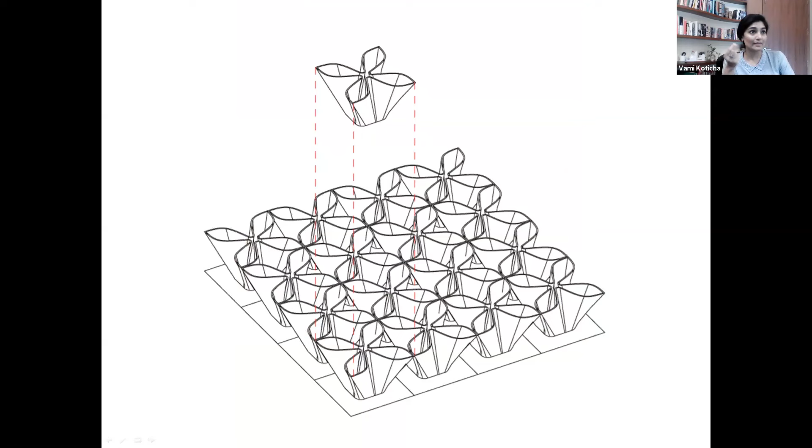Again, a very temporal space. In this picture, the red carpet that you see at the bottom is actually what we used the following year. What we did is we came up with a small module using that same red carpet and worked with these wall-to-wall carpeting guys. We asked them to come up with this module, and then all these modules stitched together, just pinned at the four edges, form a beautiful catenary arch surface.

What we've done over here is taken that latent resource and pushed it using technology to give us something that would not have been possible without pushing that kind of boundary. What it's also done is delayed the waste cycle of this raw material, and those are some images of that carpet pavilion.

The next one I want to talk about is this project, and I'll just talk about these specific items or facets of the project that address this technology aspect that we're talking about today, and here we're looking at material systems.

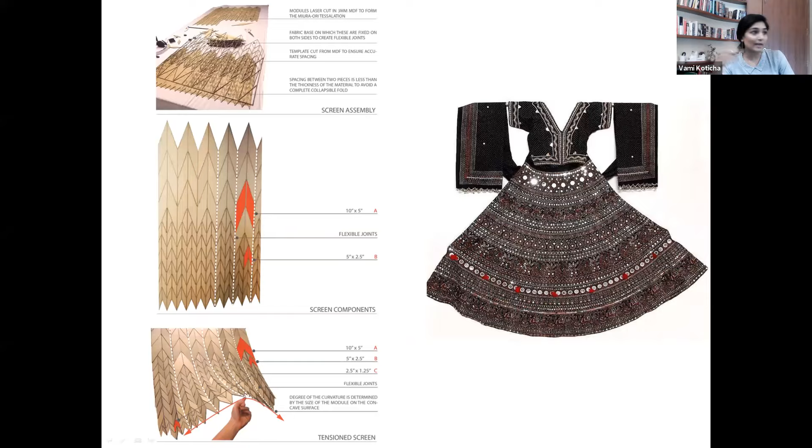So we started working with veneer and canvas, trying to see what we can do with the combination of these two materials, and started using various kinds of modules that would add structure to this fabric and body to this fabric. So the tension and the curvature in this is the new hybrid, which was a derivative of the size of the module that was being used.

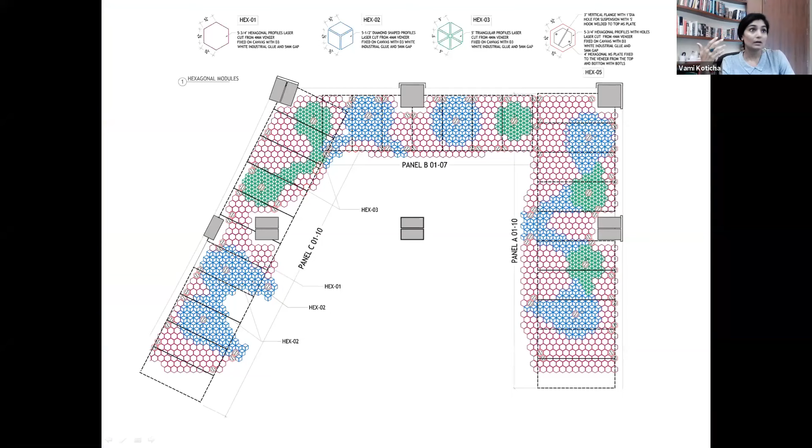Eventually, we developed 5 different modules that were proliferated all along the surface, depending on the desired result that we wanted and the kind of curvature that we wanted. It's almost like doing a curvature analysis of a 3D complex surface.

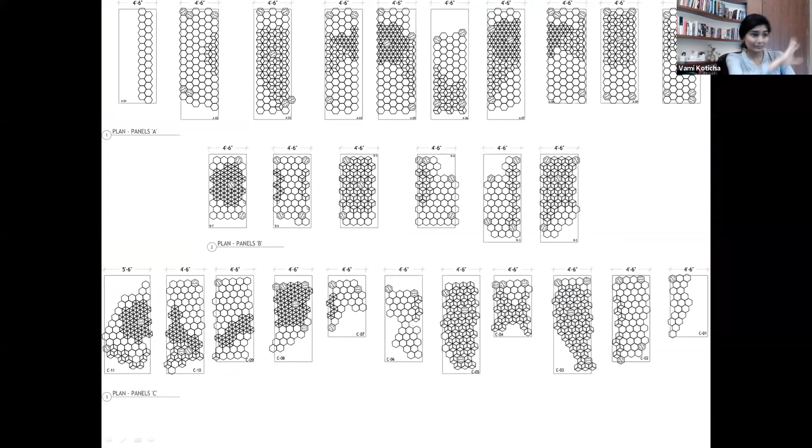These are some of the images of single pieces of canvas and how we kind of managed to lay and nest that whole thing out. And this is what the end product was - it's like a hybrid, almost like a veneer cloud floating above.

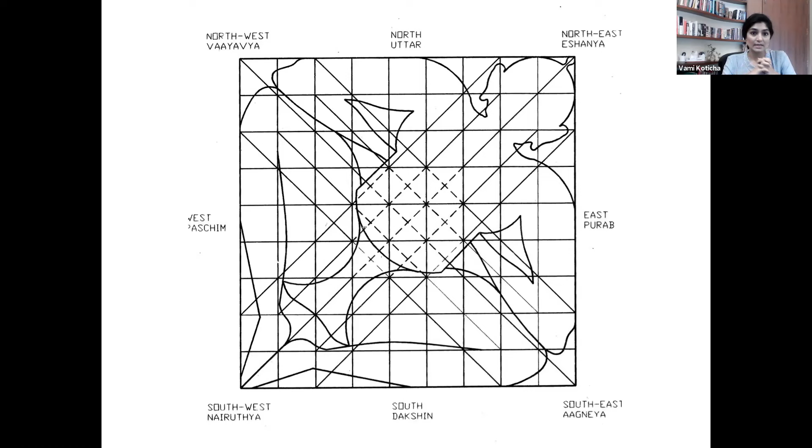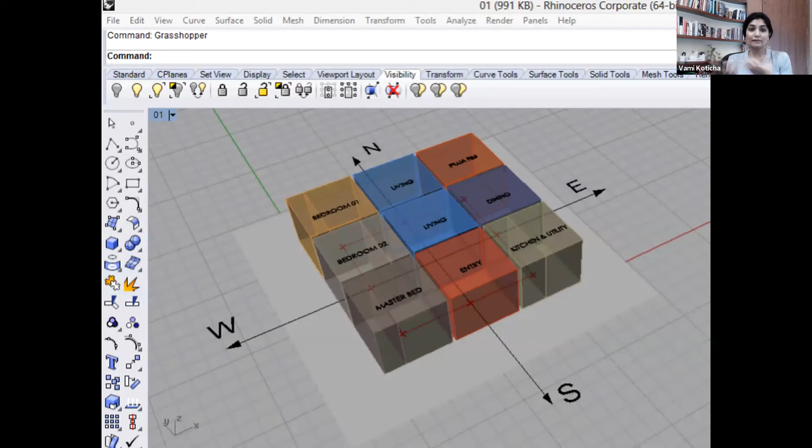The next project is a very interesting one, because we were asked to do a master plan for about 100 villas in Hyderabad. The client was extremely particular about Vastu, and so are his customers. As you all know, this is probably one of the very common memes we've all looked at, that Vastu generates sometimes irrational solutions. So the question was, how do we work with a plan typology that every time it reorients in the master plan depending on which side the entry is, or which side the plot is facing, or where the road is, it rearranges itself to generate a new offshoot.

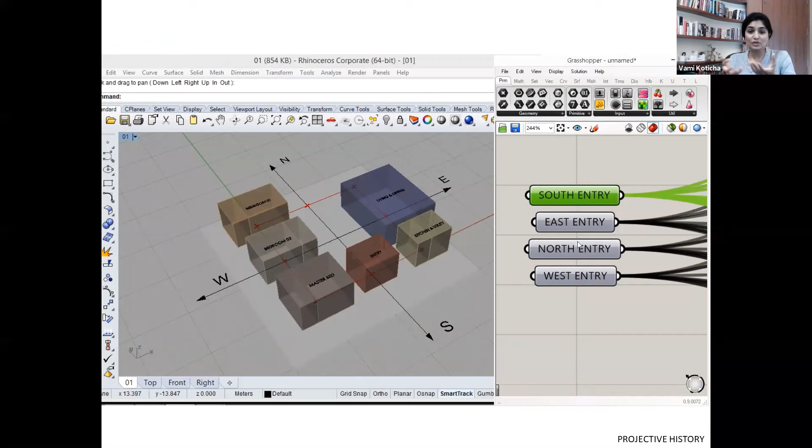So we came up with this script, and what this does is... can you all see it's moving? So what we did is we came up with this script that, depending on where the entry is, the program would rearrange itself, generating a new plan each time. That allowed us to develop the design as kit of parts that come together, generating various combinations and iterations based on the requirement, based on which side it's facing on the road, or where the entry is from, etc.

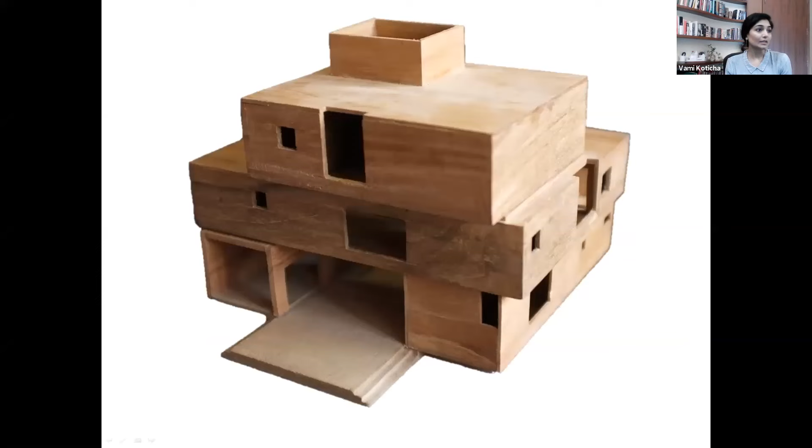The next one that I'll talk about is using technology as a tool for structural form finding. We no longer get into a project thinking that we're the ultimate authors of it. Collaborative practice is the way forward. Wherever you work, you're not the expert of everything that is contextual to that project. So the idea is you work with people, laborers, who know better than you, and your role is to push their technical extents to their respective skills and craft, while their role is to rein in the exuberance of our intent.

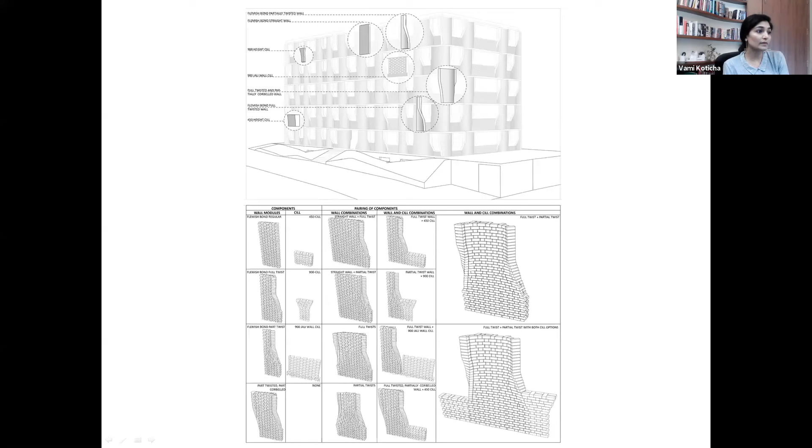In this project, you can see those horizontal chajjas out there, or lintels as we call them — they are stone lintels. What we've done with the brick facade is corbel it in a way that it becomes the support for these horizontal stone lintels. So yes, it's about the architecture of the corbeled bricks, but in a way that it becomes performative in itself.

What was interesting in this project is not just that we developed the form using this technology, but it also allowed us to develop tools that let local masons build something as complex as that. So in this case, the technology helps you structurally form-find, but it also resolves something complicated and becomes an aid in the process of building that complex form.

This next idea is one we've been discussing for the last few years in the studio — the role of architecture moving forward, and can it be more than a container, can it come in sync with our thoughts and become an extension of our minds.

Corbusier once defined a home as a machine for living. It's time to redefine how our buildings shed their passive exteriors and become the true machines for working that they are always meant to be. No longer can you ignore the inherent smartness in systems and objects. There is something called embedded intelligence, and it's important for us to address that now. Feedback loops are becoming part of our constant daily activity in everything.

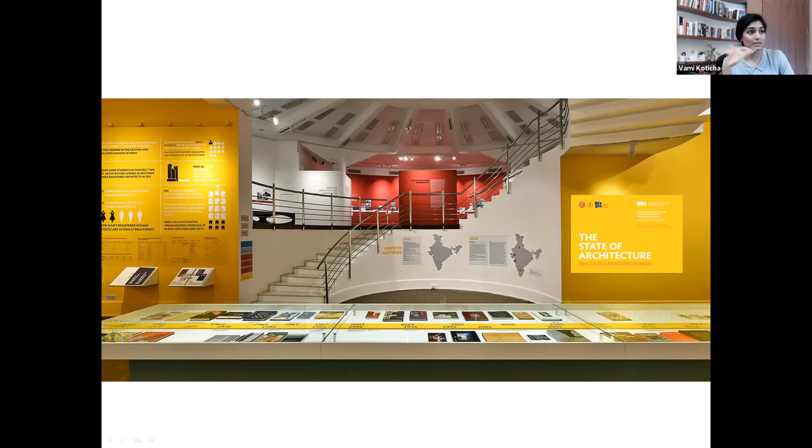This was an exhibition called The State of Architecture, curated by Rahul Mehrotra and Kaiwan Mehta at the NGMA in Mumbai. The exhibition itself was arranged chronologically in ascending order, starting with the latest work of the last two decades at the highest level. And that's what the picture at the highest level looked like.

We were asked to do an installation that would occupy the perimeter of this floor, a skin that would encompass the final exhibition showcasing the architecture of the last two decades of Indian architects.

So we started off working with a lot of responsive mechanisms, and as you can see, as that person comes ahead in front of the sensor, it kind of starts to do something else. What's happening here is based on the input you're giving, there is a certain kind of output that gets generated from what you've created.

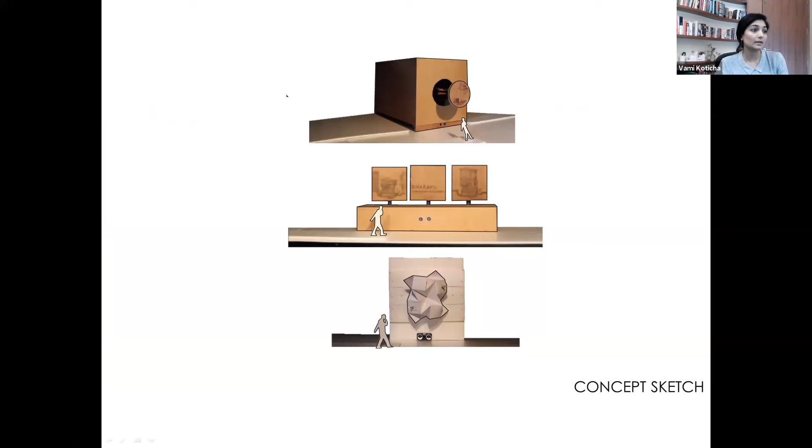Eventually we narrowed it down to an origami paper wall installation that animated itself when people would try to engage with it. It's a transitory skin installation dependent on basic electronic technology, but using a very complex idea of paper folding. The folds open and display images hidden within the folds of the paper.

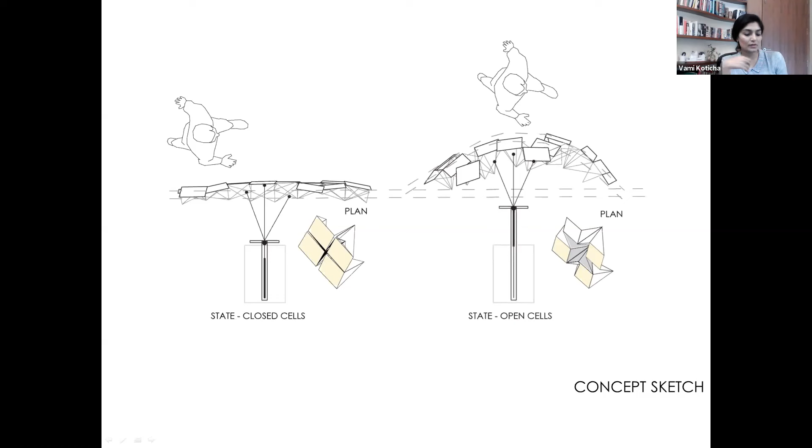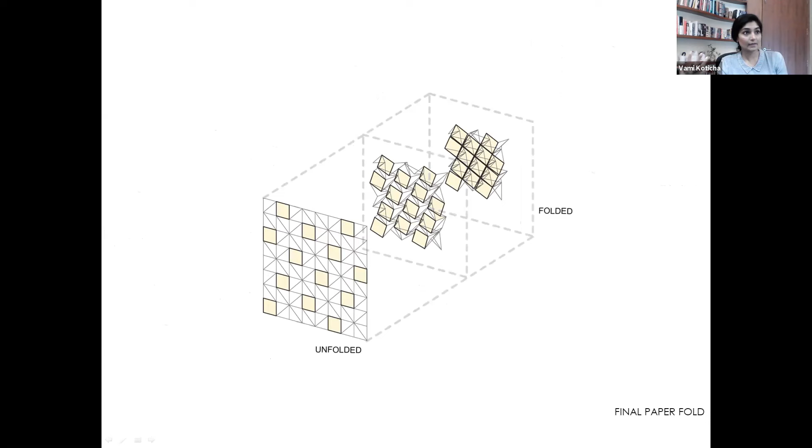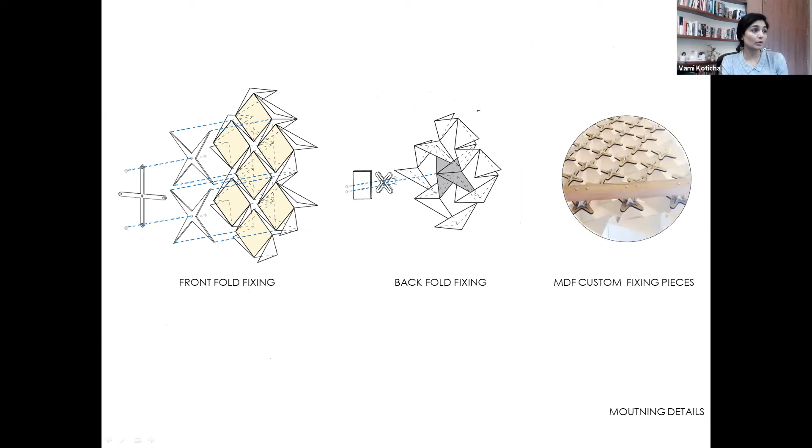The paper basically had two kinds of folds, one where it remained static and one where it would move, and there were different kinds of fixing systems for the parts that remained fixed and the parts that allowed for that movement, and this is how it got fixed on the aluminum frame behind.

This was the mechanism that went behind it. The installation basically worked on a rack and pinion system. It animated the paper. As the motor moved forward, the paper would also unfold because the pinion would move ahead, and the pinion had almost fork-like things attached in the front which would unfold the paper and then move it back, folding it again. All of this was done using Arduino coding.

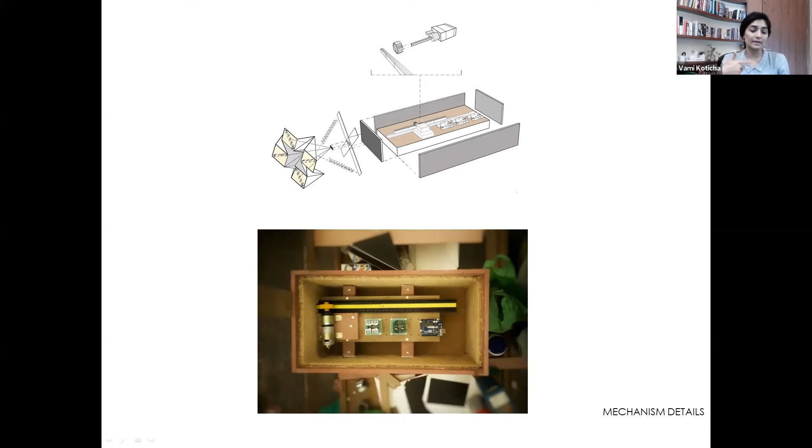The input into the Arduino goes from a sensor, and the sensor is always triggered whenever somebody would pass by in front of it.

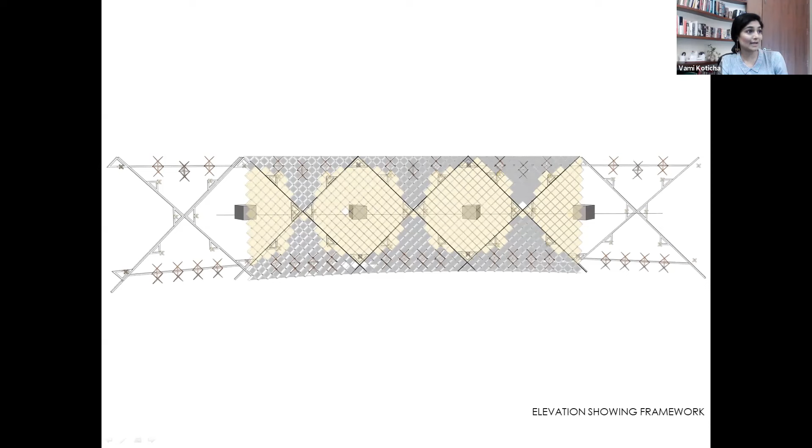That's what some of our elevations look like, where you can see the crisscross framing. You can see a front fold and a reverse fold. You can see the mechanism boxes hidden behind the paper. The yellow part shows the paper that would unfold. These are some fixing mechanisms. This is the elevation of the entire complex, like an unrolled surface showing the fold lines of the paper.

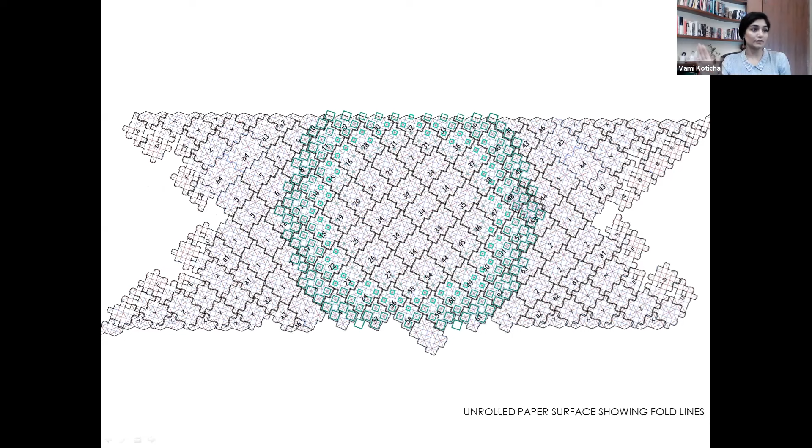So yeah, that breathing wall really created the backdrop that invoked the transient nature of the architectural codes and materialities in contemporary India. It's something we are constantly talking about, and this was our attempt to work with this kind of responsive architecture at a scale we thought we could handle at this stage.

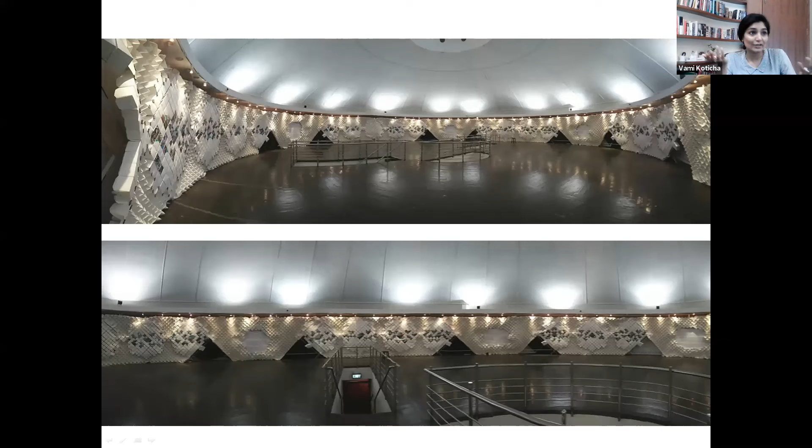But obviously this is just one of the examples of the unimaginable applications that this technology can actually have. With this, I move to the last project, the Sharda Library, which I'd like to talk about because this is one of the few English medium schools in that area.

When we were talking to Mr. Samir Somaiya, who is the trustee who runs the college out there, he was telling us how his daughter told him that if he wanted to do something good in this school, he should build a library there, and that is a special way of contributing to the youth today.

He also mentioned how some of the students would come back and tell him, sir, I love the campus, and I have this amazing memory of sitting in the campus in one nook and corner and reading a book.

That made us think, can architecture actually embed itself in the memory of a child? When we were discussing this in the studio, I realized that as a child I was extremely intimidated to go to the library in my school. It had these high ceilings and tall bookshelves I could never reach, and so many rules to abide that it always felt more comfortable taking a book and sitting under a tree reading it in the garden, which made us realize this after a lot of brainstorming.

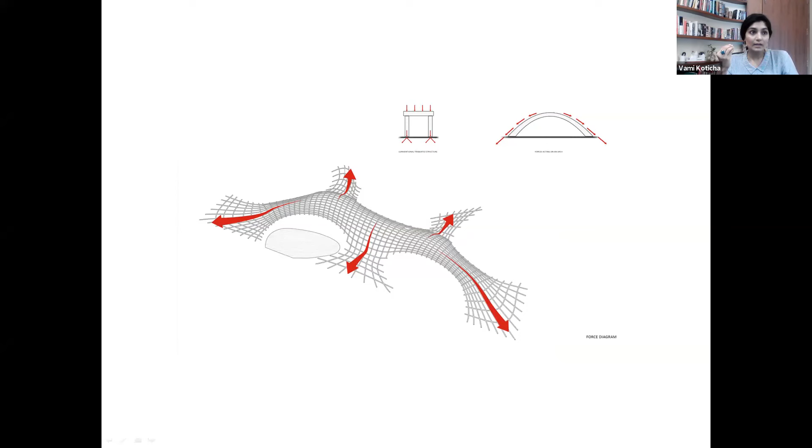Another thing we wanted to use was something locally available and of really good quality: bricks. That became our element of the structure, and we started working with that. What is the best way to use brick most efficiently? Not just as a building system or cladding system, but even structurally. How do you push the brick to use it with its utmost efficiency?

This took us back to 16th century Spain and the Catalan tile vaulting system, which was almost forgotten until Guastavino started doing some beautiful vaults in these thin brick tiles in the late 19th century. He built some subways in New York, among other things.

We also looked at an engineer from Uruguay called Eladio Dieste in the 1960s, and how he worked with compression rings, doing these beautiful thin cantilevered vaults with compression ring reinforcements within them.

Coincidentally, we also found this software called RhinoVAULT, developed by the Block Research Group at ETH Zurich. It was a fascinating treasure hunt, following clues from the 16th century to the 1960s to the current work being done at ETH, joining these dots together to reach this point.

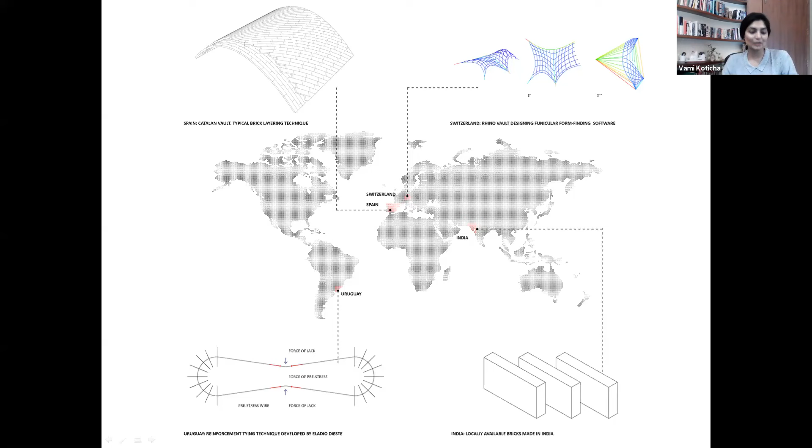So here what you see is a force diagram generated using RhinoVAULT. And this is what eventually our renders looked like initially.

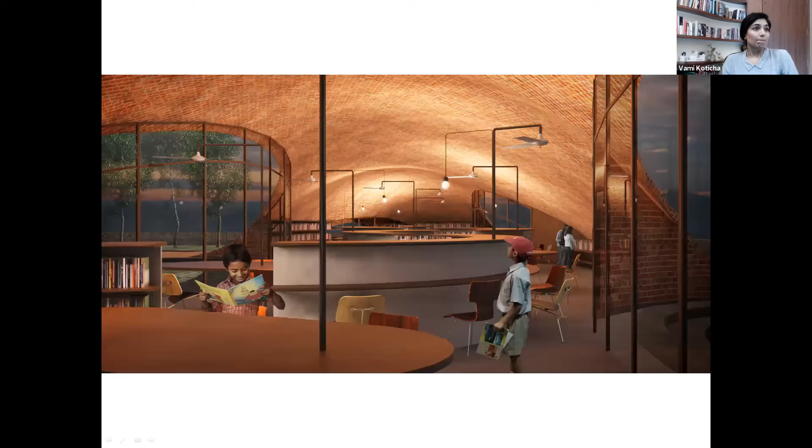We thought we were done with the difficult part of the project, but of course we weren't. Then came the challenge of actually building something like this and doing a lot of mock-ups.

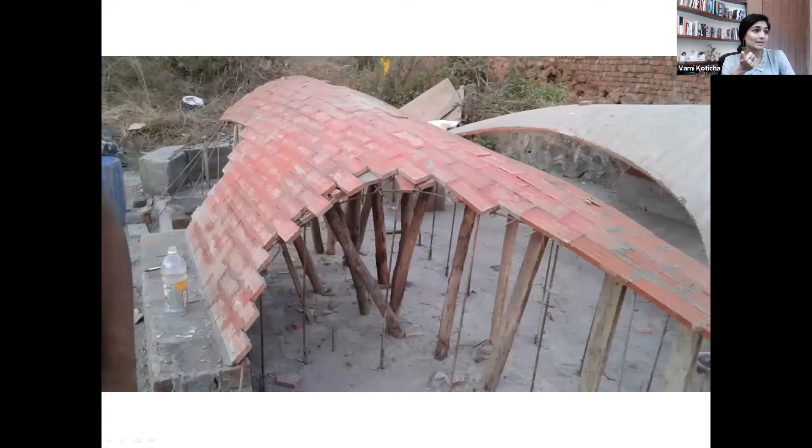Here you can see small scale mock-ups we did for another RhinoVAULT shell generated using the software. You can see us trying different formwork methods and different bricks and brick laying patterns. And of course, we failed a lot, but that's where our learning was.

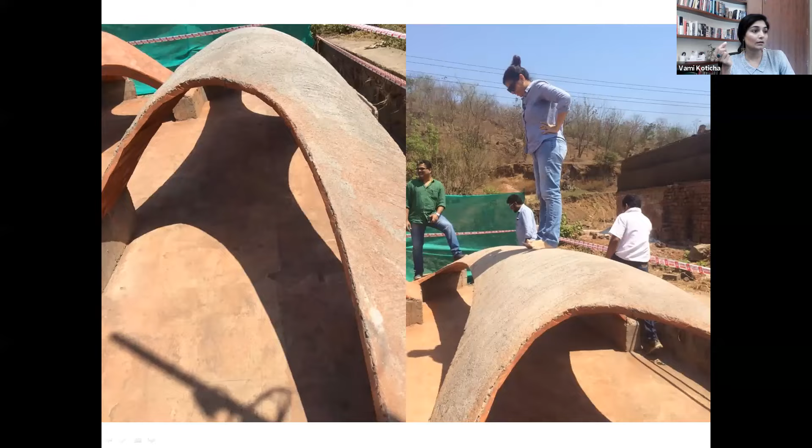Eventually we did succeed, and we managed to build these thin vaults, which were perfectly stable. As you can see, all of us are standing on it, and it was perfectly fine.

We developed a few details with our contractors on how we'd handle load transfer, what happens where the brick vault meets the footing, and how the load transfer would occur.

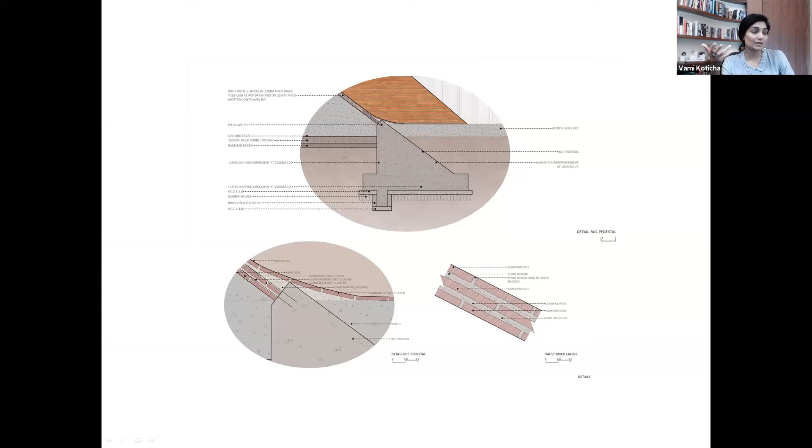Then the next challenge was actually practically building it on site at that scale. It was easy to do that little 8 feet by 8 feet mock-up, but then we had to work at a 1:1 scale, 5,000 square feet.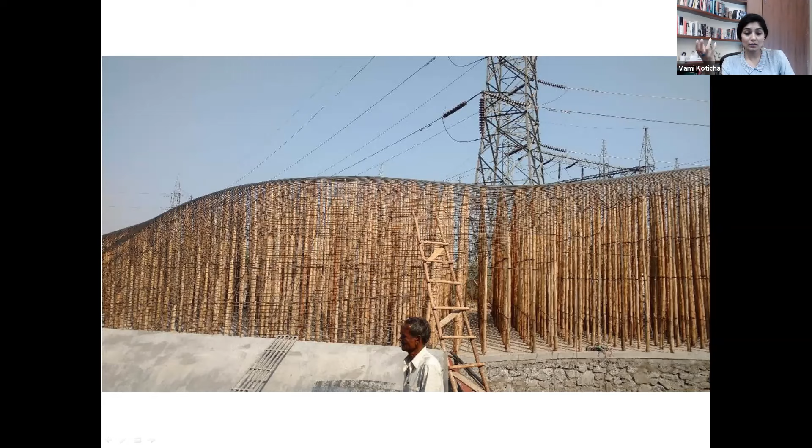We definitely didn't want to use something like ply, which would eventually generate a lot of wastage, because that ply cannot be reused once it's used. That's something we definitely didn't want to do. So we came up with the idea of using rebars and laying the entire rebar mesh on top of the bamboos which were constructed.

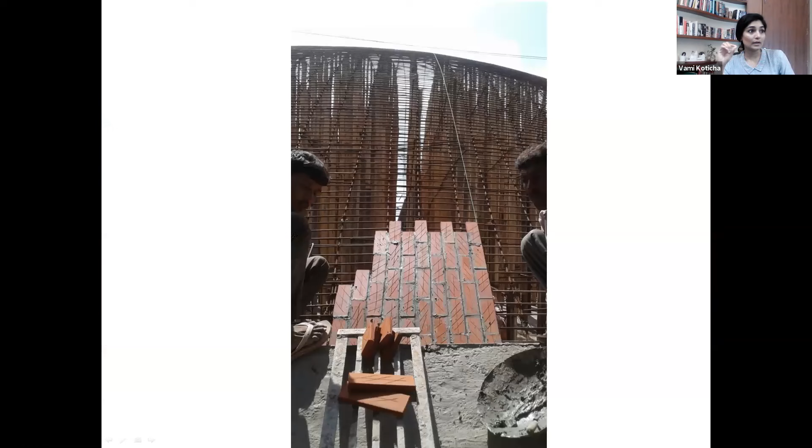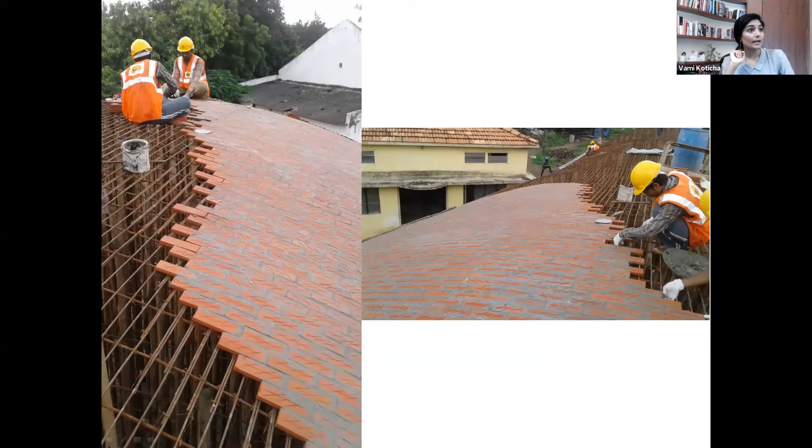And those really become our formwork. As you can see, they start laying the brick tiles over that rebar. You can see the first direction being laid here. This is what some more pictures look like. And eventually, just like that, we finished all 3 layers.

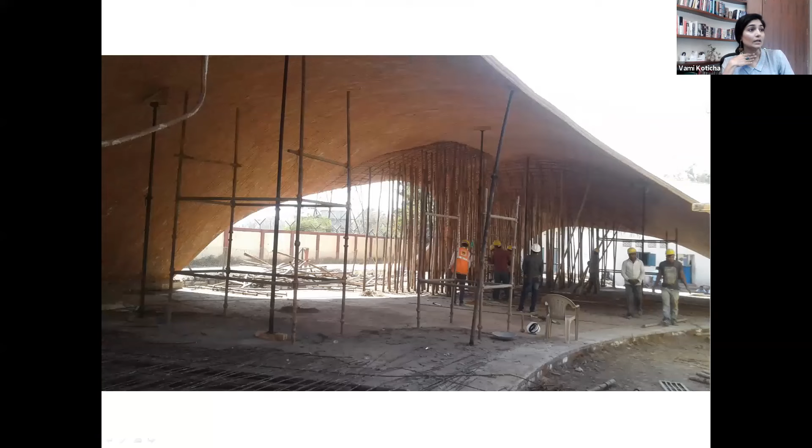This is an image of the vault with all 3 layers completed, but it is not de-shuttered yet. The bamboo and the rebar at the bottom still exist under the shell. Then slowly we start de-shuttering the whole thing, of course in parts, keeping the critical points intact first.

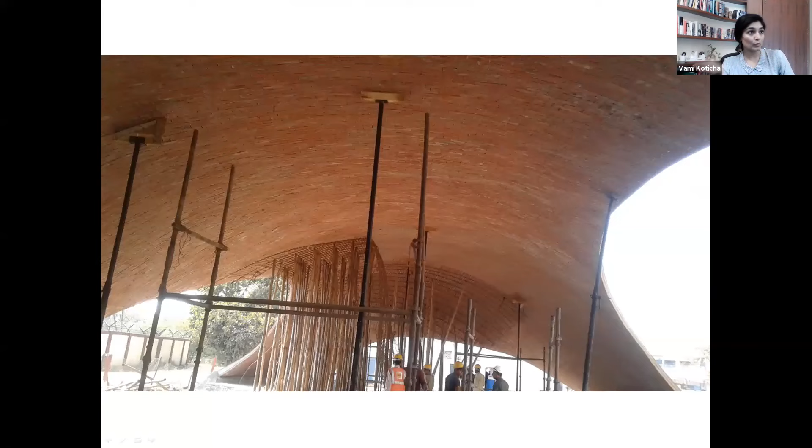You can see the rebar out there being pulled out, and that's it. The brick tile vault stayed as is, and this rebar was then taken and used on another site. This is what the eventual vault looked like after it was completely de-shuttered. So this way we didn't waste a lot of material in the formwork, and the rebars were taken to another site and used somewhere else.

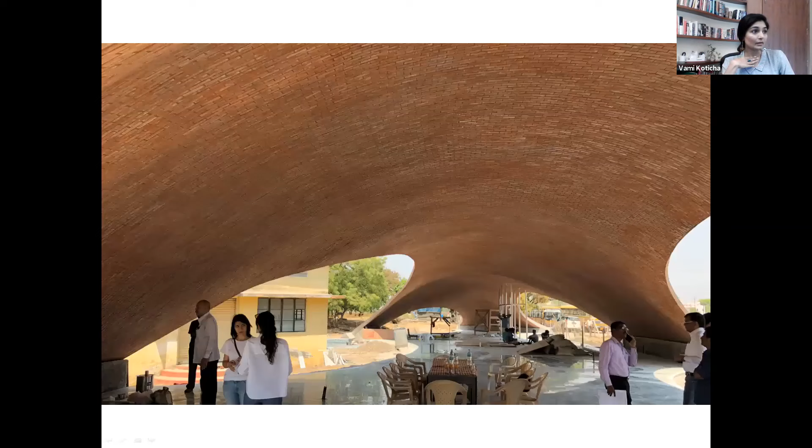The next challenge was about furniture and windows. Now we had to obviously enclose this space. It was not a pavilion. It had to be inhabited by kids and teachers, for lectures and for seminars.

Also, using the furniture, instead of keeping it as one long linear space, we started breaking the space into smaller spaces - something the kids would be more comfortable in, a scale they would associate more with.

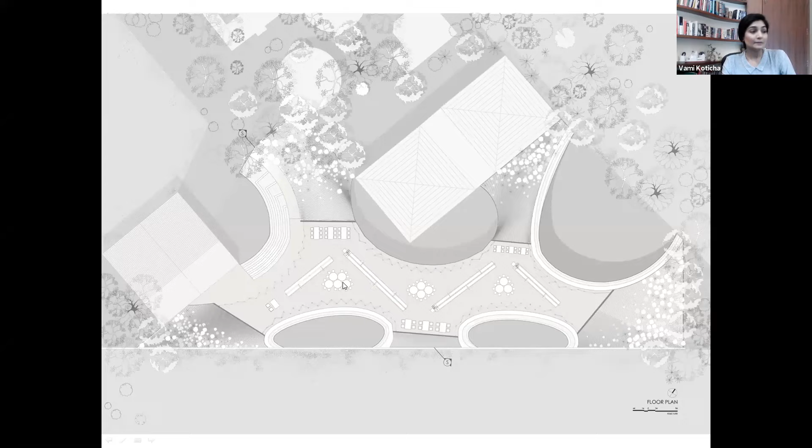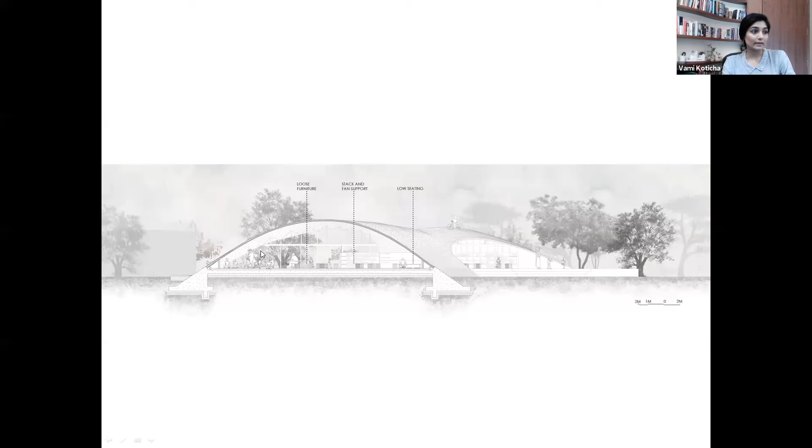So that's how our windows came along the curve in a corrugated form. And this is what eventually the final images look like. We had people walking up and down the roof, through the structure, over the structure. That's what the corrugated windows look like.

You can see there's mesh above 7 feet, and open pivotable glass doors at the bottom. The mesh is for constant ventilation, because obviously there's no air conditioning in this library, so this allows for ventilation throughout the year and at all times of day.

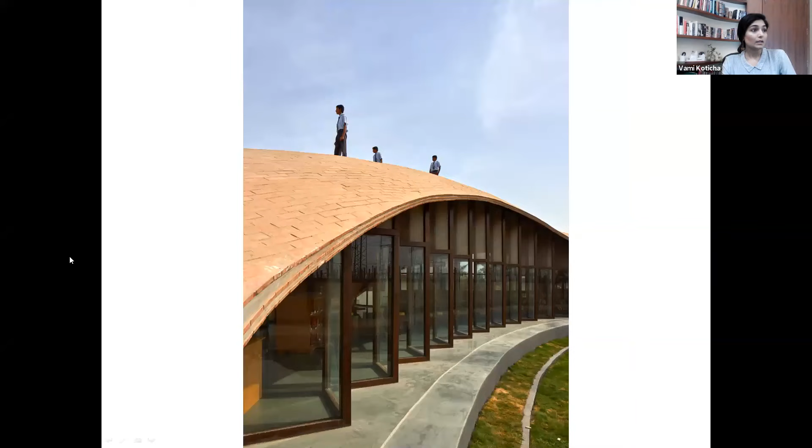That's what the interiors look like. These are the racks and all the fans and light rods that came from the flooring. They really become the infrastructure - the wiring and everything is carried through these racks that also hold the books and all the supports for lights and fans.

So the places where the vault would go and touch the ground, obviously the heights were very little and probably not comfortable for older kids. So what we did is generate these smaller stools, like Kota stone stools, and these kind of benches for the smaller kids to sit in a little nook and read.

That's what the windows look like, the corrugated windows. They are pinned only at the floor, not pinned at the top of the vault. And below 7 feet, these doors are openable, allowing people to move in and out of the structure.

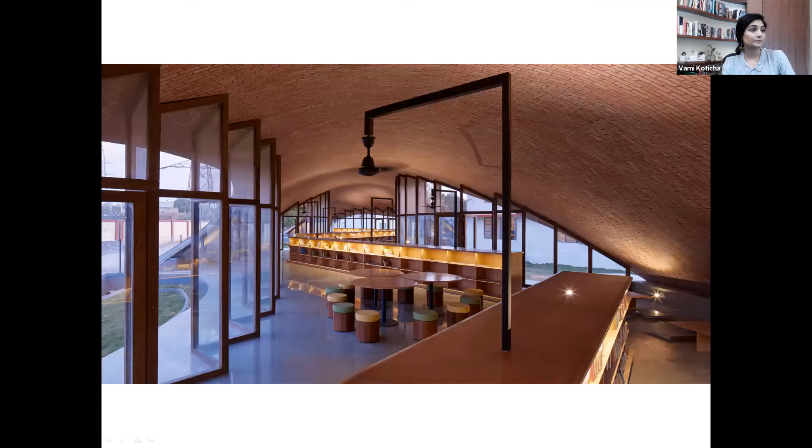What's symbolic of this project is we are not only looking at technology, we are not only looking at history as the origins of a technology as a mere inspiration which we try to replicate today. No, we are trying to take that skill set, that technology, and push it further using whatever software is available today, leveraging access to the knowledge networks we sit in. So the outcome is really about a lesson we learn not just from various geographies, but also various time periods, various histories.

And yeah, with that, I kind of end my presentation. One thing we believe in the studio is that we're never really designing buildings, we're designing ecosystems around the building. And architecture, if I may say, is extremely romantic because it's not just about the visual, it's also about the emotion it evokes within you.